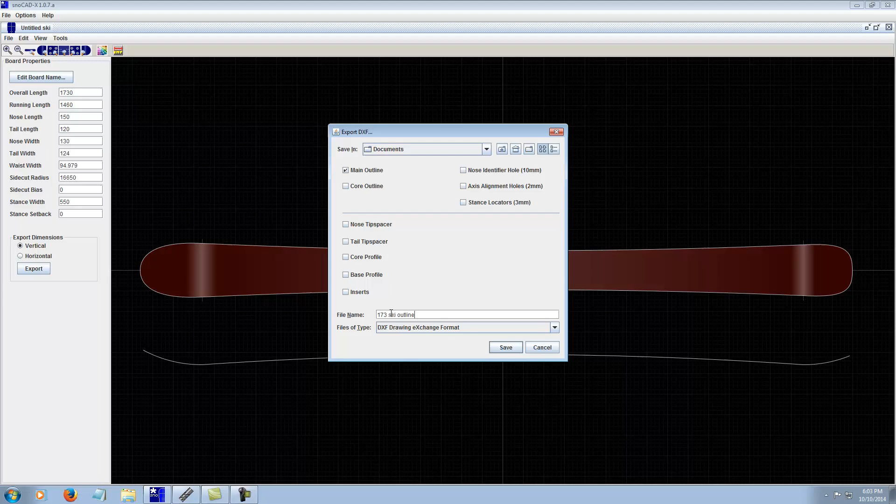So you should name it. In this case, maybe this is a 173, so I'm going to rename this 173 ski outline. And that way I know that it's the outline shape of my 173 ski, and if it's a 173 GS or Freeride or Freestyle, whatever, name it like that. Save, and that's all there is to it. We've now exported some CAD geometry in DXF format that pretty much any program can read to either cut parts or a template file that is this shape.

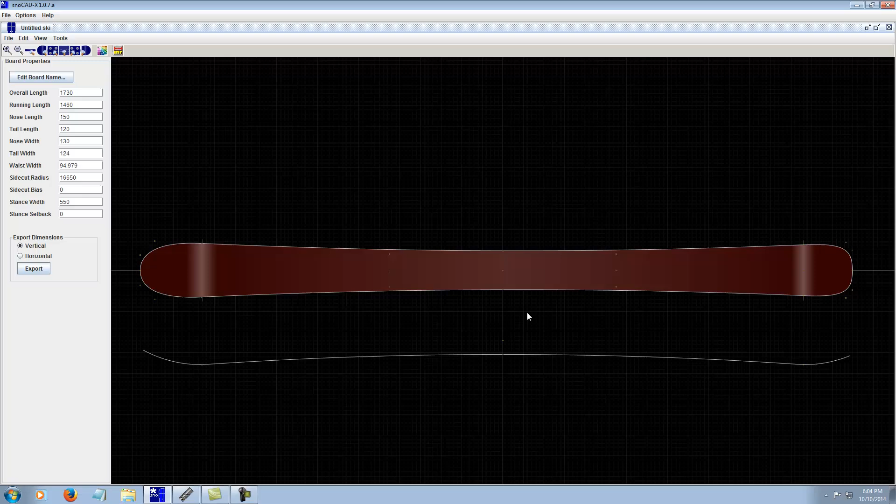The second file we want to export is our base template, and this Snocad software has a really clever little mode on it called the core editing mode. And even though we're going to be exporting a base template file, we can use this core editing mode to design the geometry 2 millimeters smaller than the ski shape in order to give us the offset necessary for the steel edges.

When you are in the core editing mode, you then open up under the Tools dialog box the Core Shaper. It opens up a secondary dialog box that gives us a few different sliders to change a bunch of different parameters. The two we're concerned about for our templates in this case are the core sidewall width here, this slider, and you can see as I drag it to the right, the sidewalls, the white portion on the screen, get really wide, and as I go narrower it gets smaller. So you can determine whatever you want the sidewall width of your file to be by dragging this slider.

The other thing you have to be concerned about is the tip spacer type over here on the right, and for a base template it absolutely has to be set as sidewall. There are these other choices which can be used for the core template later that I'll demonstrate, but for this base template, leave it set at sidewall.

Now, as I was saying, typical steel edges on snowboards and skis are approximately 2 millimeters wide. So by dragging this slider down until we say 2 millimeters, you'll now notice that the little white offset here is now skinny, and it is basically 2 millimeters wide around the whole perimeter of the ski. So it corresponds to a perfect template or base material file that's 2 millimeters narrower than the ski.

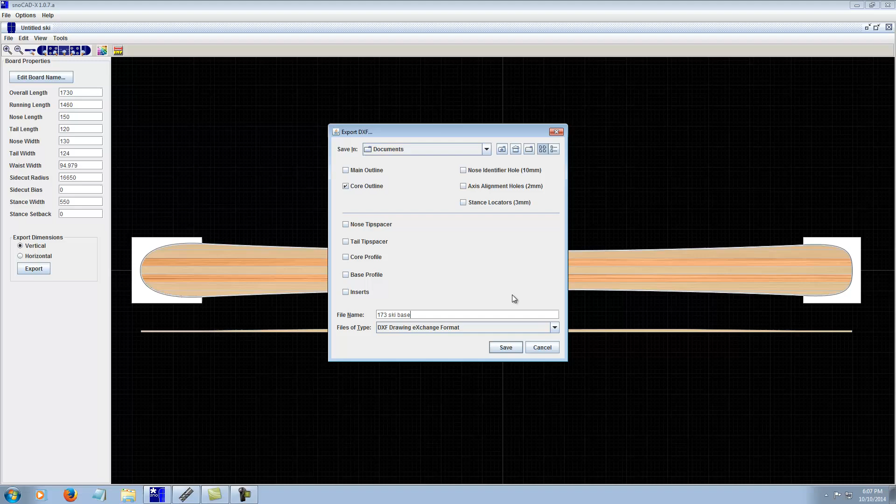And this could be used either to cut bases or a base template. I actually like to cut templates sometimes instead for cutting my materials, and use a hand router to cut them rather than the CNC, but either way, this file will cut either type. Click Save, boom, and that's all there is to it.

Now, the third file I like to export is for the actual core itself. There are a few different choices we need to make here, and I'll go over them right now. Go back into the Tool Core Shaper mode, and you're back to this dialog box. The first thing you want to determine is whether you want to do a tip-through-tail wood core, where the wood runs right up the tail and right up the tip of the ski to almost the very end. This gives a very lively type of ski, super high performance, lots of pop. A lot of the freestyle and park guys like stuff like this.

Or you want to do a ski that has maybe a radial offset where there's a little less wood and a little more plastic, which gives us a somewhat more quiet ride on the snow, but still has a little bit more snap. Snocad has a few cool little features where you can change this radius tighter or smaller by dragging this slider. And you can also change the overall length of the tip spacer material. In this case, you don't really need to change that. Same thing on the tail, you get a radius where you can change that.

The third type you can do is an interlock, where it's basically the sidewall shape, but it has these little notches that go into the core that allow you to sort of jigsaw puzzle the tip fill a little tighter on your skis.

So if you're doing a layup in your mold where you do not pre-fasten your tip fill to the core, this helps hold everything in place in the mold, so it might be a way you want to do it. I generally don't use this, but it is used, and Snocad includes it as a feature in the software.

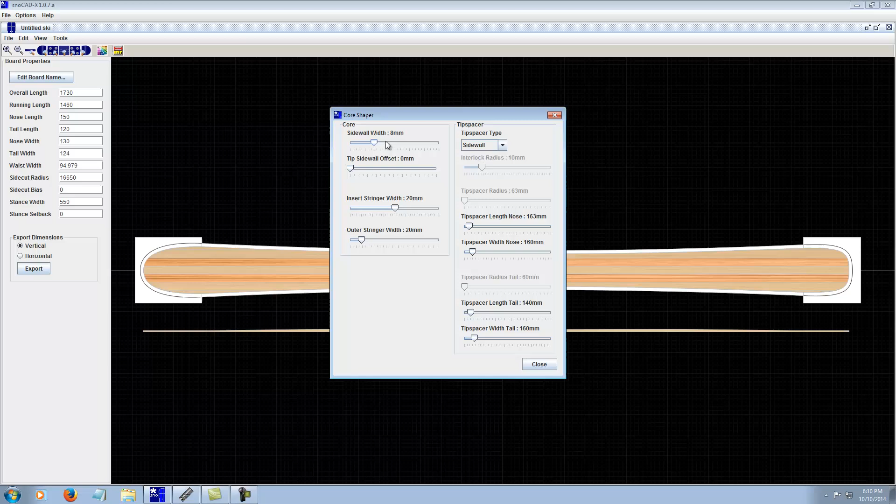So I typically set this at 8, but that's at your discretion depending on how wide your sidewalls are and how you like to trim your skis or boards out. So in this case, we're going to set it at 8. And like I said, instead of a sidewall shape with the wood tip through tail core, I'm going to set this at straight. So what's going to export is basically the wood shape here that's kind of rectangular on the ends with an offset for the sidewalls of 8 millimeters.

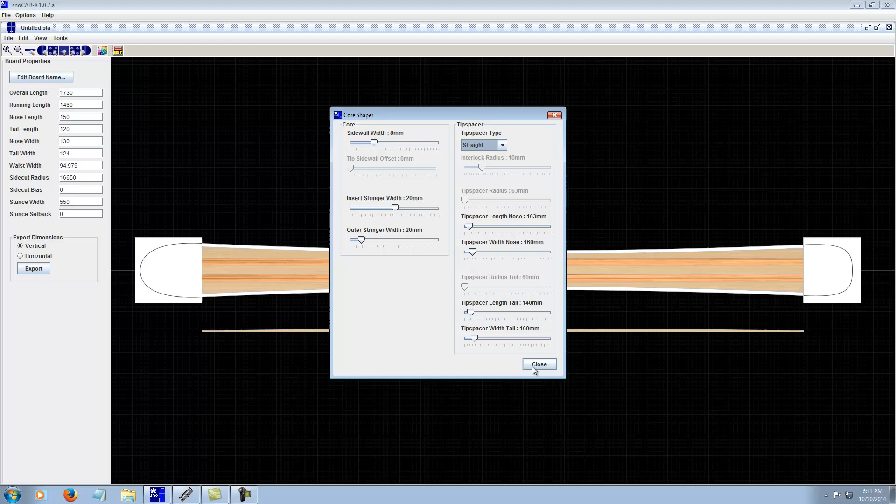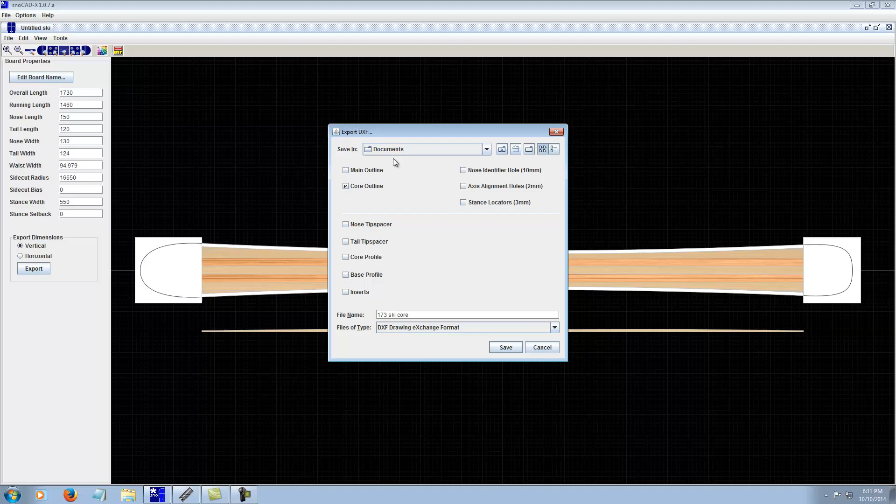So I'm going to close this out, go back to my File Export DXF menu. And again, you want to choose the core outline and turn everything else off. Name the file correctly so you know what it is later. And this is ski core. And note where you're saving it again. Mine, I'm saving it just to the default documents directory, and save it. And that's all there is to it. That's all 3 files that I would typically export for my ski or board design.

One thing I should note is that Snocad does also have a core thickness mode in here where you can export this geometry. I find that I don't particularly like the data that it exports in any usable format for me to actually make a core file. So I kind of ignore doing thickness in here. I might design the profile just to look at it in the file, but to actually do the core thickness geometry, I'll do that in a different package and demonstrate it in a different video. I just find this data doesn't do much, so that's why it's being ignored at this point.

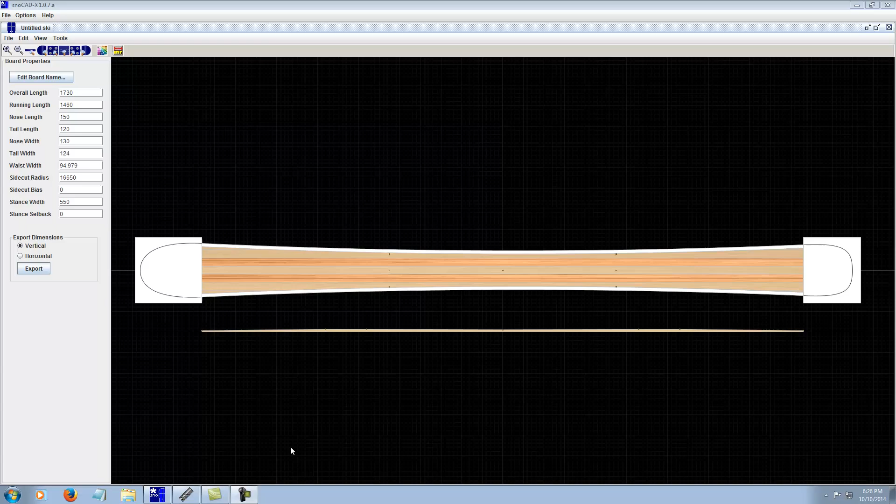So after we've produced the different geometry files out of Snocad, you want to import them into some other package so we can set the files up to actually cut something with them. For doing base material or templates, I have found that the package called Sheetcam, a CAM package out of the UK, is a great little package for doing that.

It has a really simple interface, and it works really well with Mach 3, which is the driver package that I use on our CNC machines, and most inexpensive CNC routers tend to use it as well. So it's a good choice, and it's what we include with our machines. So I'll demonstrate that now.

So Sheetcam has a whole bunch of setup you have to do ahead of time that I'm not going to demonstrate in this video. All your options for your job, your machine applications, bits, and everything like that. That's not really what I'm going to go into too much in this video. I'll do a little bit of the actual setup where it's concerned with actually doing the G code. But the Sheetcam specific video we have elsewhere will have more detail on setting it up.

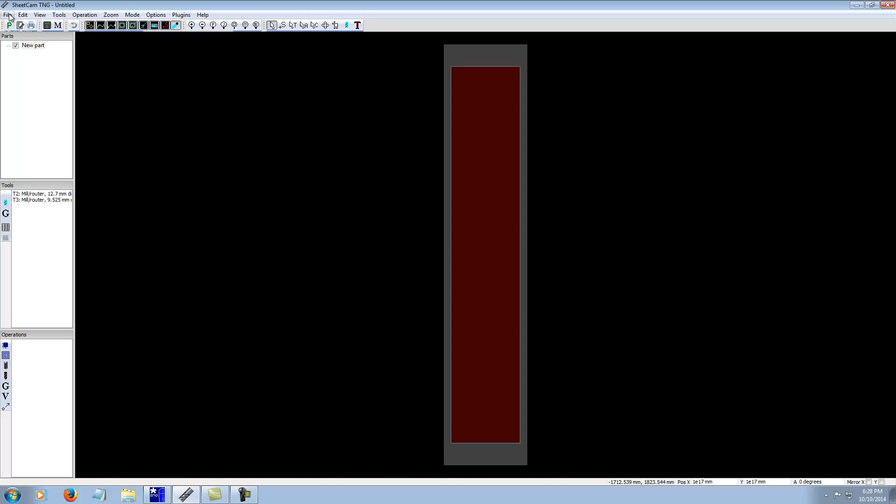Anyways, in terms of these 3 files we just made in Snocad, I'm going to import the outline template first and set it up to cut a piece of 1/2-inch MDF to make a typical ski outline template that I would use for edging my skis. So go to the File menu. I'm going to go Import Drawing and then navigate to my Documents folder where the geometry is stored. So here it's in my Libraries Documents folder.

This dialog box has a few different choices of file formats. You want to make sure it's set at DXF. If it's at one of these other settings, it won't even show you the DXF files in that folder. So I want to set it to DXF. And I just need to scroll down until I find my 173 Ski Outline DXF file, choose it, and open it. It opens up a dialog box here.

I want to set my scaling at metric because Snocad exports their DXF files in metric. And then the other thing you need to be concerned about is where it's going to open it up on your drawing space. I typically set it up to import right in the center of the table of my CNC. And so I choose the center and click OK.

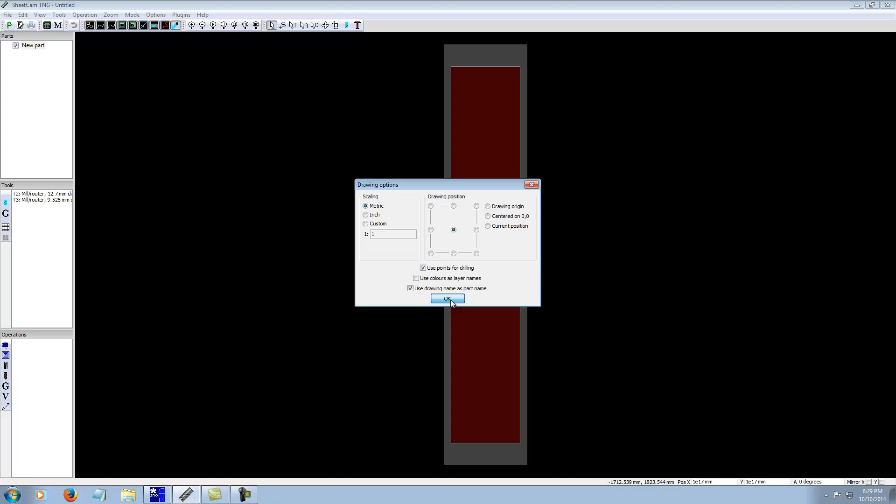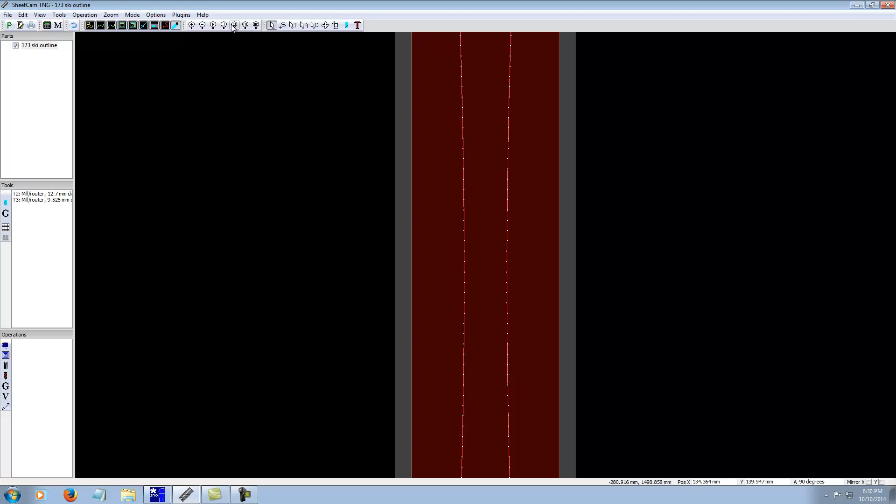Now you'll see that the template opened up sideways, and if you remember when you're designing the skis in Snocad, they're actually horizontal like this. It's a real easy fix to change that. Down here in the right hand corner there's a little menu here that says degrees, and you simply select and type in 90, hit enter, and then you'll see that the geometry file rotated into position correctly. Up here, these are your zoom keys. You click the zoom to extents, and that shows you the ski on the screen.

Now, in this case, I've set up this red in the job options as 330 millimeters by 1800 millimeters, and it could either be a piece of MDF, which we're going to do in this case to cut a template, or it could also be the size of the base material you want to trim this ski out of. But anyways, that's set up in one of the dialog boxes elsewhere. But since I'm going to cut a template in this case, it's all ready to go.

The gray indicates the size of my CNC router's cutting area. Our CNC multi-cutters have a cutting area of 400 millimeters wide by 2010 millimeters long. So that's what the gray area represents in this particular screen. So the first thing, now that we've got our geometry in here, that we want to do is choose a tool to cut it out with.

For cutting templates, I typically use either a 1/2 inch straight cut or a 3/8 inch straight cut bit. And I've designed a tool here, which I'll set up under the tools menu. My tool number 3 is a mill router 9.525 millimeter diameter router bit. And 9.525 millimeters corresponds to the metric equivalent of 3/8 of an inch. So it's basically a 3/8 inch straight cut bit.

And I'll open up the edit tool menu here, right click that, open it up, and it opens up a dialog so you can see what all the settings are. In this case, the type is a mill router bit. They have other ones, drill, V cutters, tapping heads, etc.

But of course, since this is a cutting bit, you want to set it up as mill router. The tool number is number 3. The diameter is set up as 9.525 millimeters. That's the actual diameter of the tool. The flute length is basically, the flutes are the blades on the actual cutting head, the length of them. And in this, the particular bit I have has 1 inch blades on it, and the metric equivalent of that is 25.4 millimeters. We set the tool length offset to 0.

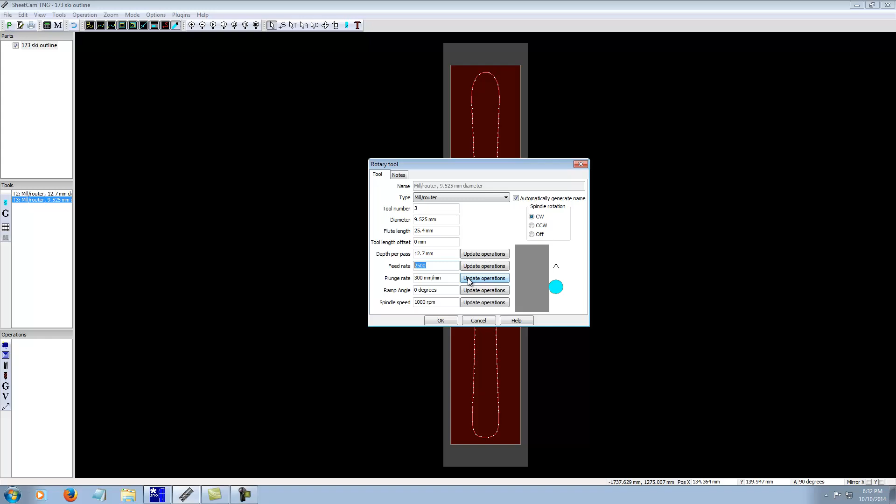Feed rate. On our CNC multi-cutter machines, I recommend using a feed rate of anywhere from about 1500 millimeters per minute to 2500 millimeters per minute, depending on the material you're going to cut. In this case, because it's 1/2 inch MDF and we're going to cut it in one pass, I'm going to slow it down just a little bit so we aren't torquing on the machine too much. I'm going to slow it down to 2000 millimeters per minute.

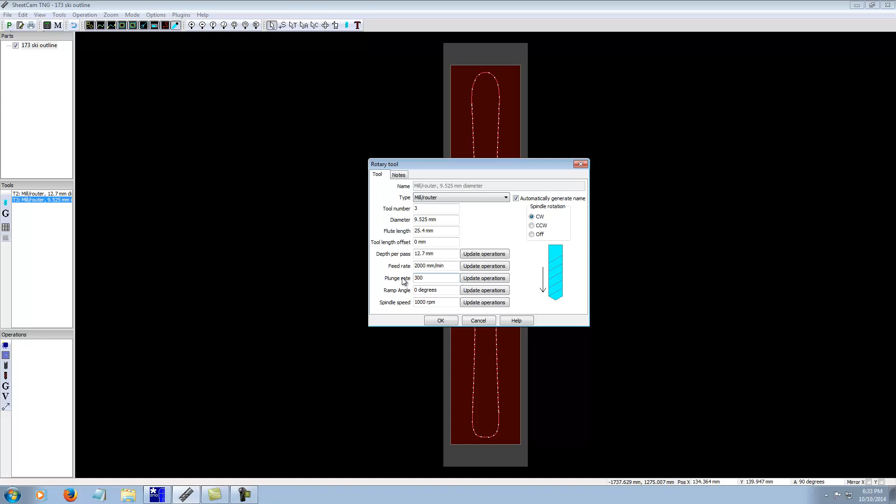But that's generally dependent on the stiffness of your machine, the torque handling your motors have, and the chip removal rate your bit can handle. For most of you, all that stuff is going to be way over your head, and you can cut slower or faster with this machine, but in general 2000 works pretty good on our CNC multi-cutters and typical small CNC routers.

The plunge rate is how fast the bit drops down vertically into the material. I tend to set that lower at a rate of anywhere from about 150 to 300 millimeters per minute, so it sort of drops in slowly and doesn't torque on the bit and create a little notch in your template or your base material because the bit kind of grabbed a little bit as it entered the material.

There's another dialog here for ramp angle, where you could angle into the material instead of just plunging straight in. I actually prefer to do a straight in drop, particularly because I also use the Donek blade cutter on this machine, and for cutting out die cut pieces, you typically want to drop straight into the material with a plunge, not ramp into it. Otherwise you waste some material, unless you're just using the male or the female part of your material. Anyways, for this example, leave ramp angle at 0.

Spindle speed, the default is 1000 RPM, but my machine actually has a router on it, not a spindle, and the router has just got an on-off switch, and any speed control is actually controlled on the router itself. The G code from SheetCam can send out signals to change the spindle speed if your machine has a spindle on it.

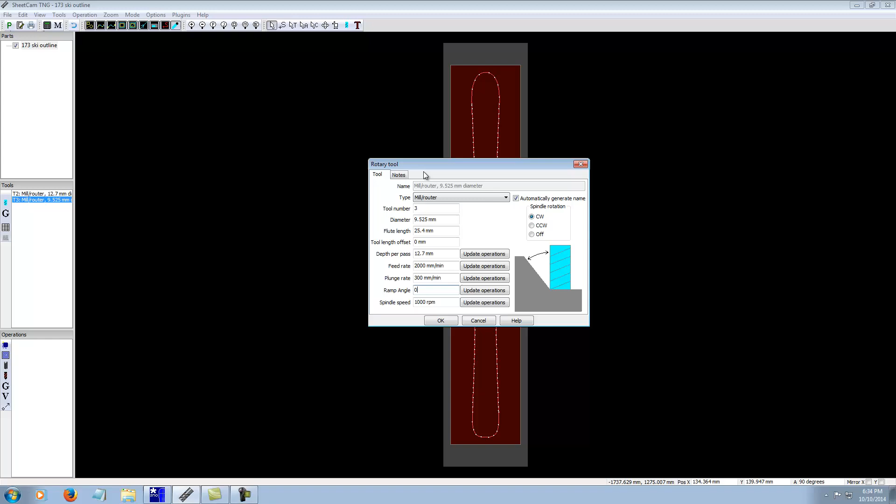However, most of you probably don't have $25,000, $30,000, $40,000, $50,000 machines that have spindles on them. So more than likely you can just ignore this dialog. You don't have to change it to 0. It'll just get ignored in your G code because your machine doesn't have a spindle. Same thing here, you can leave generate name checked. The spindle rotation here, you can just leave it at its default. So this is ready to go. I just click OK, and at this point nothing changes. I just wanted to set up my tool correctly.

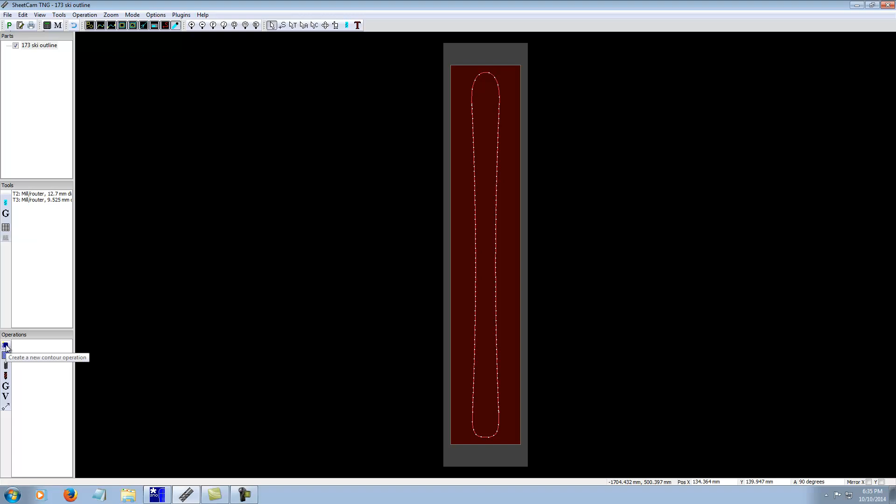Now, in order to generate a G code to cut this file, we go down to the operations menu, and this top little icon, when you mouse over it without clicking anything, says create a new contour operation. And what we want to do is exactly that, a contour cut of this thing. So you click this button and it opens up a new dialog box giving you a whole bunch of different choices.

We're going to use an outside offset, meaning the bit is cutting on the outside of this template or outside of the material to leave the remaining part perfectly the right size. With an inside offset, the bit will be on the inside, and the outside of this material will be your usable template, which is useful in some cases.

But in this case, we want to set it as an outside offset. The layer is board. SnoCAD always exports, whether you're exporting a ski or anything out of it, the layer that you're concerned with is called board. You just choose that in your dialog box here. It's usually the only one if you're doing a SnoCAD file. If you're exporting out of another CAD package, you may have a zillion different layers and want to cut various layers at different times, so you can choose the layer that you want to cut individually here.

The tool is selected. I've got tool 2 and tool 3 on my machine, but I'm going to choose tool 3. It was already set up. The start depth, 0 millimeters, corresponds to the top of the material the way I have this machine set up. So 0 is the top of the MDF. So when you set up the Z-axis on your machine, you want to zero it out on the top of your material, and that will correspond to 0. And then it's going to cut below that material whatever depth you specify here.

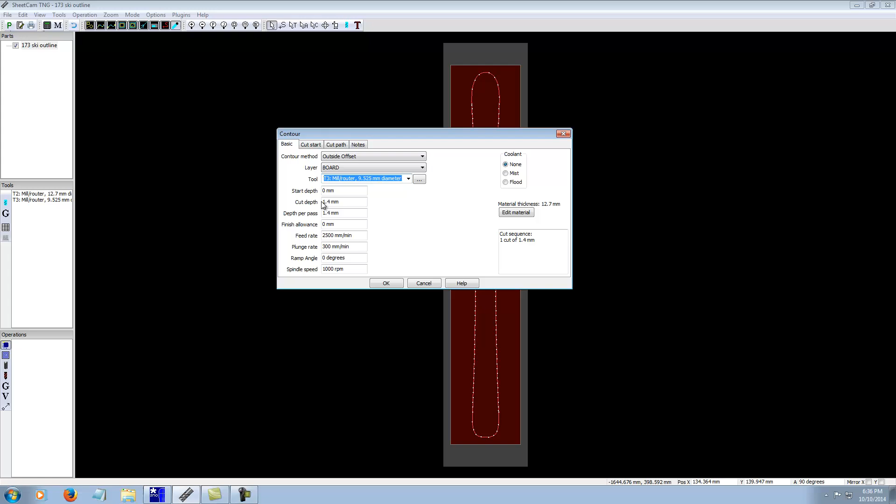In this case, it's also set up for 1.4 millimeters like that other dialog box was, where it was set up the last time I cut for cutting base material that was 1.4 thick. In this case, we want to change it to 12.7 because we're cutting 12.7 millimeter thick MDF. Depth per pass means each time it goes around this shape, if it's set up at 1.4, it's going to go down 1.4, and then another 1.4 millimeters deeper, then deeper, then deeper. So this would take 9 cuts of 1.4 millimeters, and then 1 cut of 0.1 millimeters to cut this overall 12.7 millimeter thickness.

That's crazy talk. You don't need to do that. I would just set this at either 1 or 2 passes around for 1/2 inch MDF. I usually just do 1, so I'm going to change this to 12.7 millimeters. Here, finish allowance of 0. You could change that to leave a teeny bit of material on the bottom of this, like 0.1 millimeters, so it doesn't cut all the way through. But I usually like to cut my templates all the way through, or maybe 0.1 millimeters finish allowance there.

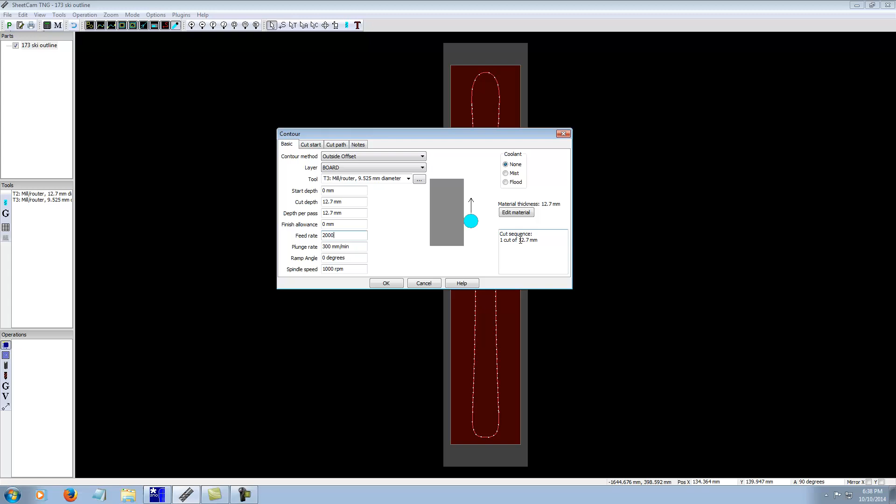Feed rate, again, I set up the bit at 2,000 millimeters, but you can override that here in this particular contour cut by changing it to 2,500 or whatever. I'm going to change that back to 2,000 here. And the plunge rate is, again, how fast the machine drops vertically into the material as it's starting to cut. I'm going to leave it at 300. Ramp angle, spindle speed, I can just ignore. And you'll notice now the cut sequence is just 1 cut of 12.7 millimeters. It'll go around the shape once, and it'll cut out the template in 1 pass.

I click OK, and now you notice some new stuff lights up on the screen. It's a bunch of arrows that show the path the bit is going to take around the material. And then this blue line going up from 0, 0 on my machine, which is at the bottom left, up to there is where the machine's going to start. SheetCam just has kind of a wizard that arbitrarily decides where it's going to drop into the material, and in this case it's up on the upper right tip of the ski. There are some parameters in here you can change to drop that in a different location, but I usually leave it at the default. And that's all there is to actually generate the code.

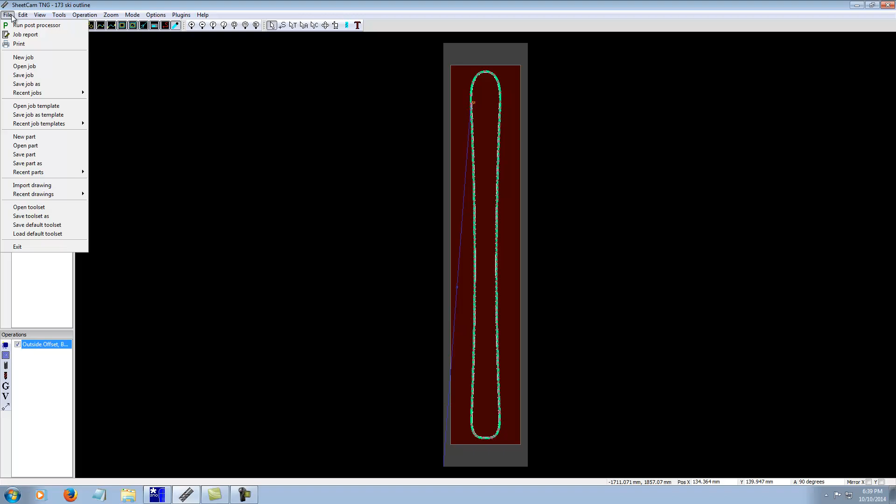Now, to export this code into an actual G-code file that you can then load into Mach 3 or whatever cutting software you have, you do a third step. And that is up here in the little P icon, the Postprocessor, which in this case, if I mouse over it, shows as Mach 3. Or you can go File, Run Postprocessor. I'm going to just go File, Run Postprocessor, left click that button.

It's going to open up a dialog box where you want to save the file. I'm just going to save it again in my Documents folder, and you notice that it automatically named the file 173 ski outline, but it has the G-code extension .tap. My particular machine is set up to use tap files. Other machines may have NC or other different file extensions, but tap is what my machine is set up for, and typically what many machines that use Mach 3 use.

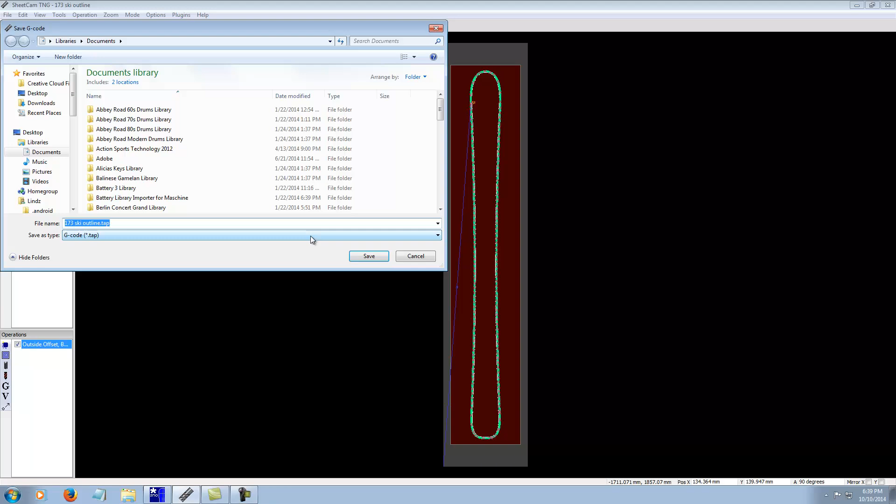Anyways, if I save this, it will export a G-code file suitable to load into Mach 3 to actually cut the template or part that we want to do. So I click Save. And then it gives you a little completion, or this can actually be an error message. In this case, it says post-processing part, blah, blah, blah, post-processing completed, and there's no errors.

However, if you run this and there's a red dialog box under here with a bunch of text in it, it'll typically say error, and then the machine will give you some sort of a hint as to what the problem is. If you set up the Z wrong, it might say file will cut into the table. If you've got a radius incorrect or something incorrect, it'll actually give you a hint of what you need to go back and fix in your file.

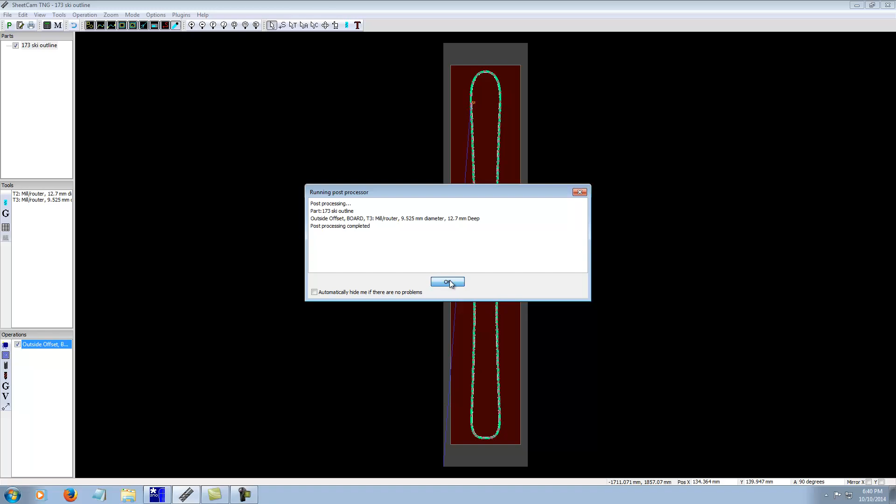Sometimes it's hard to figure out what's wrong, but in this case there's no error, so I'm actually done. And this file is ready to cut out of Mach 3. Now we can do the same thing with the other two files. I'm not going to go through that again because it's exactly the same process as we just did.

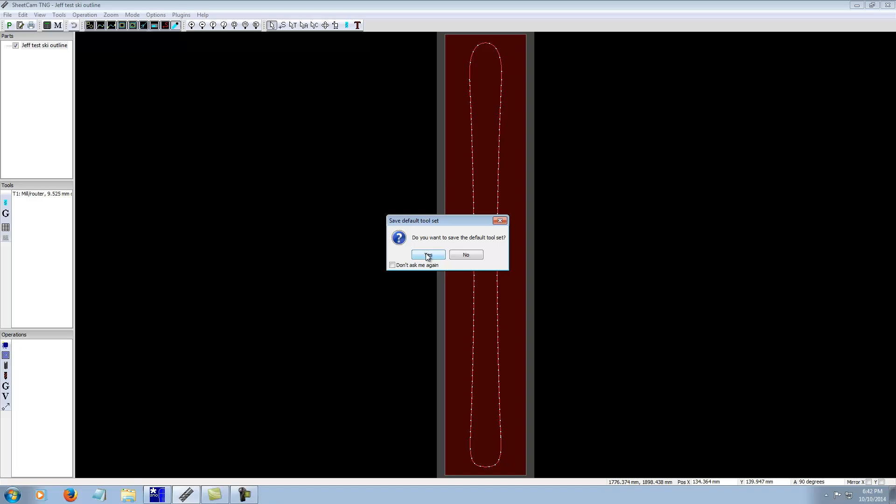Alright, the third step after you've finished exporting your G-code out of Sheetcam to actually cut your template or file is to load the file into Mach 3 and actually set it up to cut. So close out Sheetcam. Yeah, I might as well save the default tool set. And I'm going to go to my Mach 3 icon and load it up.

If you have one of our CNC Multicutter machines, instead of the different choices here, one will just say CNC Multicutter. But in this case, on this particular computer, Mach 3 is where my setup is for my CNC router. I'll just click OK. And that'll open up Mach 3. Again, I'm not going to go into a lot of detail of all the setup of Mach 3. We're just going to show how to load a file in and get it ready and start it cutting.

Typically when your Mach 3 opens up, it has some sort of an error message, either a limit switch or a no shuttle detected type. That's typical of the machine, and if you click reset, and as long as after you click reset you have no message down here, that means everything should be talking to the router correctly, and you should have no problems with your file. So click reset first.

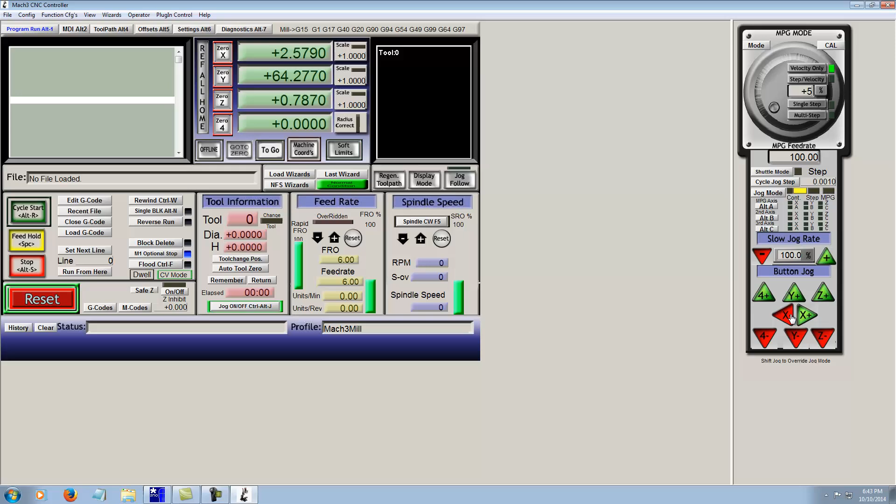I often like to hit the tab key, which opens up my virtual joystick over here on the right, if I want to move the router head around to set up my Z-axis depth, etc. But that's not crucial at this point. To load the file that we just did, we're going to go File, Load G-Code, and then navigate to our My Documents folder, which is the default place it looks. And you'll notice here the 173 ski outline tap file that we created is here. I select that and hit OK.

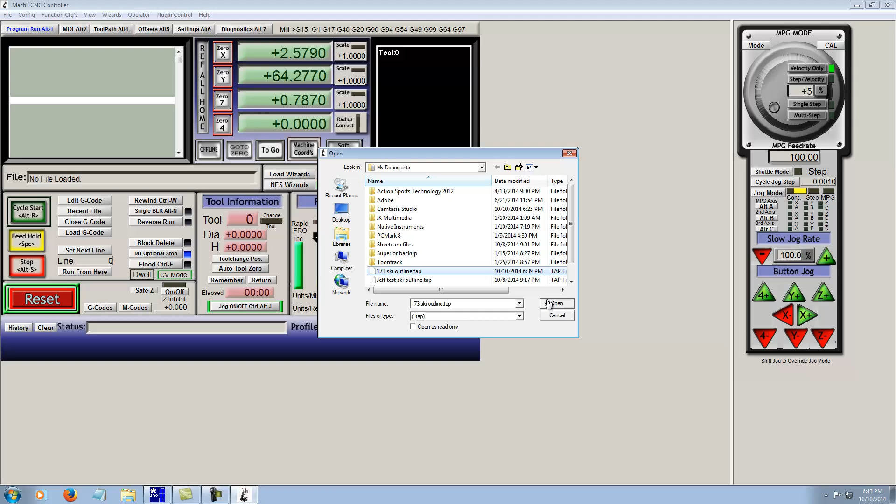And you'll notice now that it opened up here, and in the little machining window here, you can see a ski outline, and then a pink crosshatch that indicates where the actual router bit is on my table right now. And you can see it's way up on the upper left near the start point of the ski there where the file is going to start.

What you want to do very first thing is let the machine know where 0,0 is. If you haven't already indexed your machine, you want to do that now. And on our CNC multi-cutters that have auto limiting on them, what you do is click the Reference All Home button here, and then it will move the router head down to 0,0 and reset X and Y to 0. So we'll go Reference All Home and click the zero out too, so I've got 0,0,0 showing here.

Now typically I set up the Z-axis on our CNC multi-cutters to be a manual one, so you will have to manually set the Z to the top of your material by hand using your joystick, and that's demonstrated in another video. I'm going to assume that your Z-axis is set up correctly here and ready to go.

So you'll now notice that the crosshatch is down on the bottom left corner of the machine, and that's where 0,0 on our particular routers and most CNC routers corresponds to the bottom left corner of the cutting area of your machine.